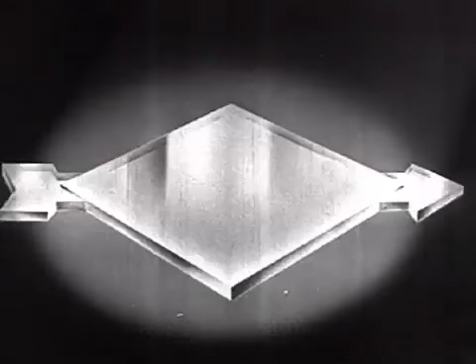The flash of power, the gleam of oil. In the sky, the power of oil conquering the heights. On the sea, the might of petroleum pulsing in great engines of the liners that traverse the deep. On land, oil feeds the fiery furnace or drives the diesel engines along far-flung rails of steel. And on the open road, well, you know what makes your auto run.

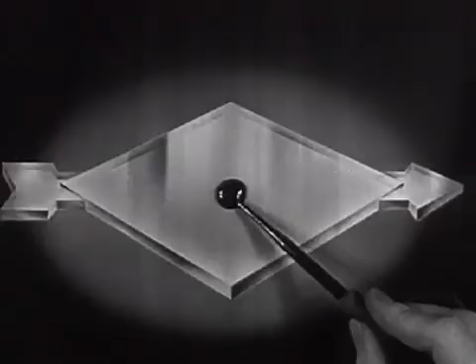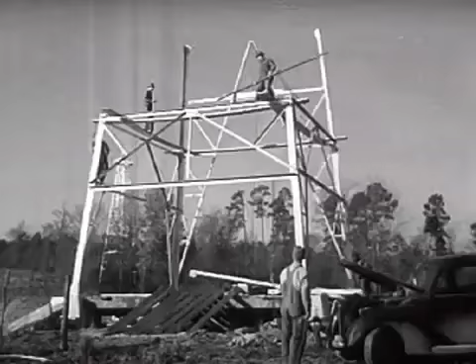For millions of years, this source of power slept peacefully in the dark recesses of the earth until modern magic loosed the liquid energy from its subterranean prison. Great areas became forests of towering derricks. And here's how the petroleum forest grows.

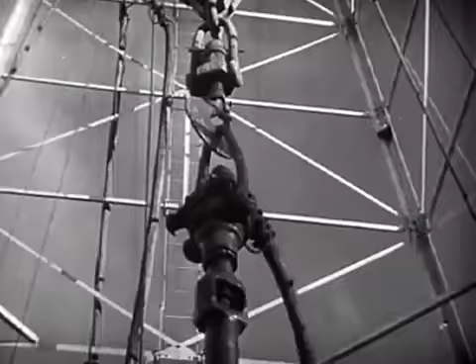A cellar is dug, and a rotary table to turn the drilling stem and the bit is set in place. Round and round the rotary goes, drilling deep down to oil. A steam engine drives the drilling mechanism. They're inserting a length of pipe, lengthening out the stem for deeper drilling. A new joint is waiting.

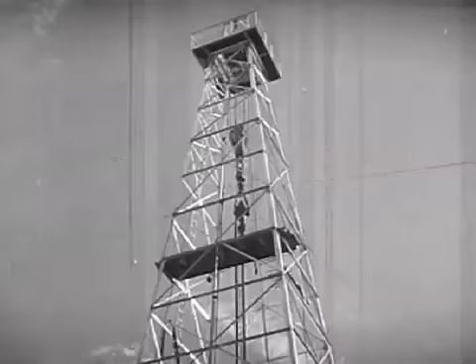Oil field workers are called drillers, roughnecks, roustabouts, rope chokers. The oil field treats our ears to odd and colorful names. Now the drilling stem has been lengthened, then round and round once more.

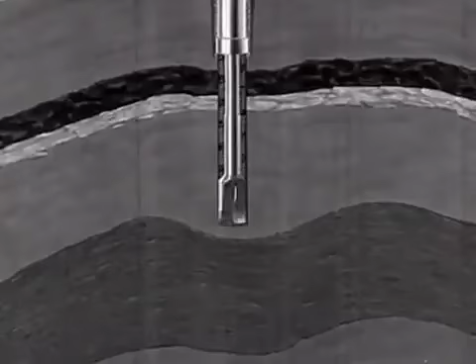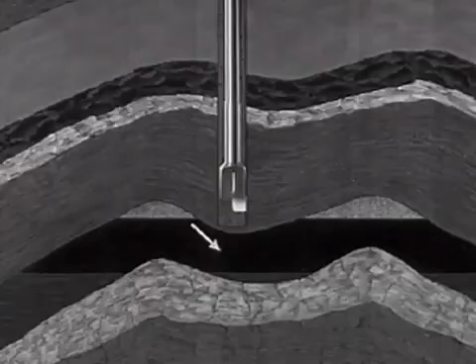Down through layers of sandstone, shale, limestone, down to astonishing depths. This well 5,000 feet. Some 10,000, 2 miles into the earth. And then, after weeks of drilling, fighting against natural obstacles, the drill at last reaches the oil sand, porous rock, which holds the oil much as a sponge holds water.

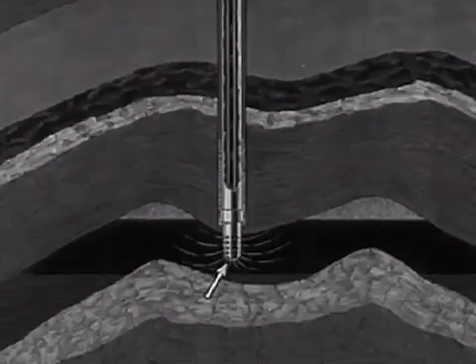Next, the casing is lowered to the bottom of the hole and cemented in position. Then drilled through the oil sand, and a screen is installed at the base of the casing. The screen extends down into the oil sand. The oil flows through the screen, up through the small pipe tubing to the surface.

So they've struck oil, and now the well must be cleaned of the mixture of drill mud and oil. Some wells flow of their own pressure. Others must be pumped, need power.

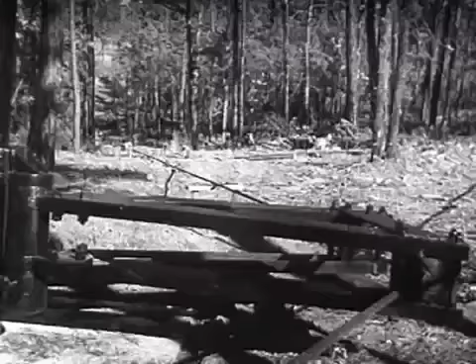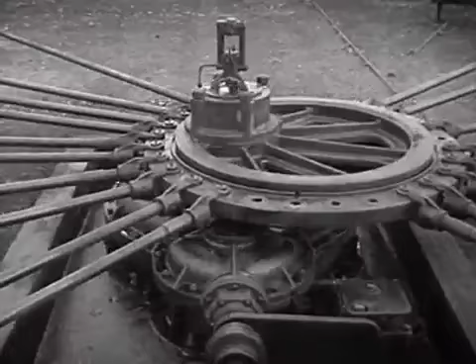The power is transmitted to groups of wells, the ever-swaying rocker arm, the rhythm of pumping, the unceasing heartbeat of the oil fields. A 24-well hookup is the height of oil field power, pumping black magic from 24 drillings in the earth, all at the same time, out of the ground.

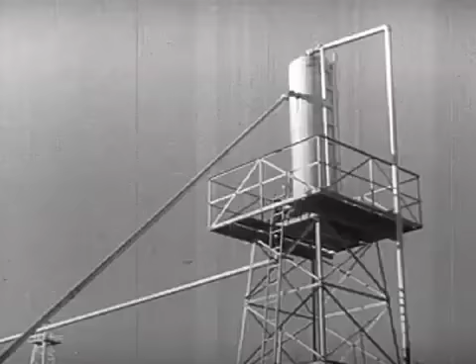The oil is cleaned of natural gas or water, which is combined with it. Next, the petroleum starts on its way through a great network of pipelines. There are powerful pumping stations every 40 or 50 miles to keep it moving along the lines.

The lines of pipe, alive with racing oil, run through forests and over plains to these silver discs. They're storage tanks where the oil rests briefly before it rides the waves in giant tankers. And they're masterpieces of shipbuilding, those tankers of steel. The largest navigate the sea at 15 knots and carry 5.5 million gallons of oil.

The voyage of oil to the refineries. The refinery with its modern structures, technological towers, minarets of science, docks, office buildings, pageant of industry.

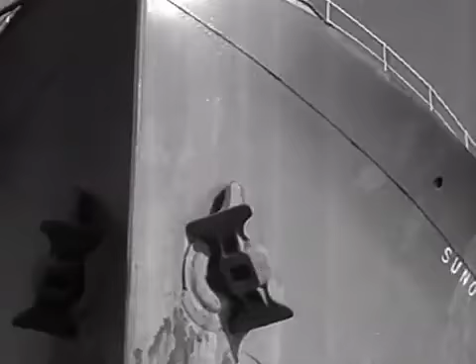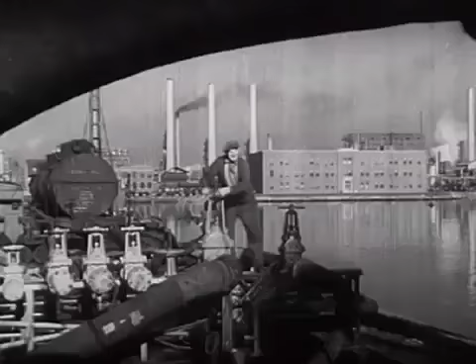Day after day, there is an endless flow of oil as the tankers discharge their liquid cargo. Unloading oil is a vast operation of piping through huge hoses. Discharge pipes on the vessel and receiving lines on the dock are connected, and a cargo of 5 million gallons is discharged in less than 24 hours.

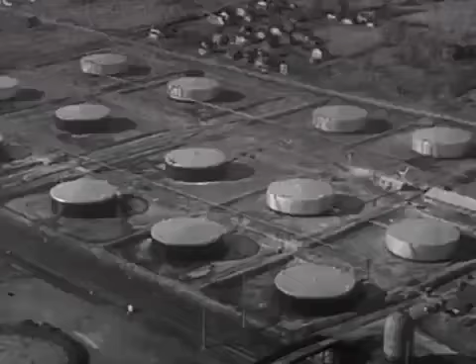No two cargoes of crude oil are alike, so each boatload must be stored in different tanks, and each batch must be processed individually, with laboratory tests to indicate the precise treatment for each.

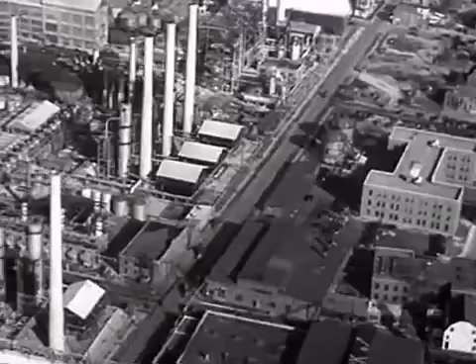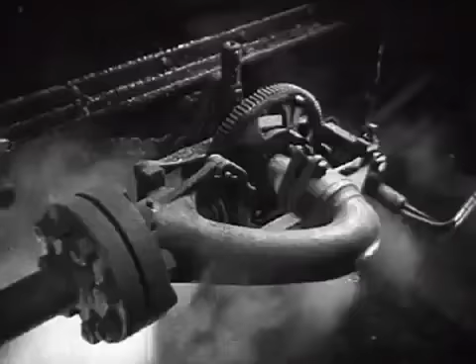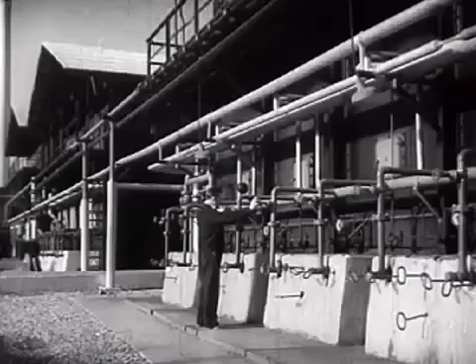That is embodied science. Those masses of strangely wrought steel, forests of stacks, glowering and hissing boilers, leaping and winking fireboxes. Intense heat, the flames roar in the furnace, yet the oil flows so fast the heat does not scorch it. And scientists wrest from the crude petroleum its tremendous power in the form of gasoline and other fuel oils.

And that's done in these towers called fractionating towers. They divide crude oil into the lighter and heavier parts. Those of different boiling points liquefy at different levels in the towers.

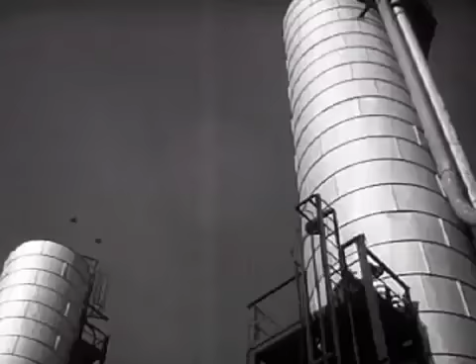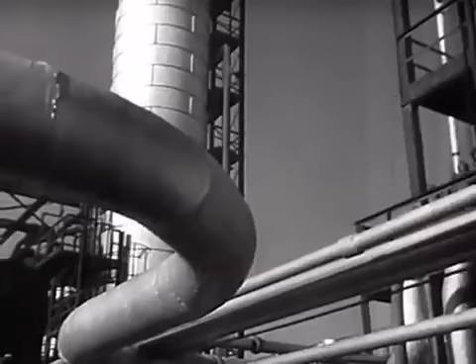Some lighter than gasoline liquefy at the top. Heavier parts liquefy further down. At the bottom are the heavy fuel oils, or the raw materials from which lubricating oils are made.

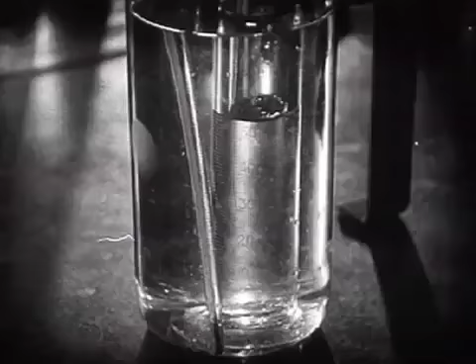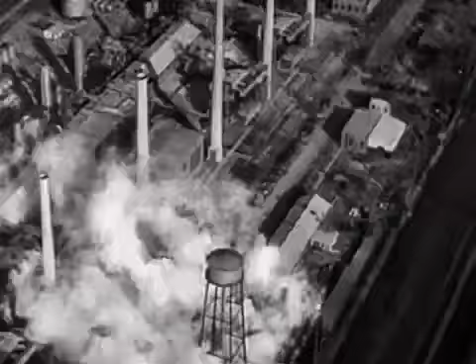When increasing use of motor cars pyramided the demand for gasoline to extraordinary heights, scientists were called upon to devise new methods. How could a greater proportion of gasoline be extracted from the crude oil than that obtained from the fractionating tower alone? To meet this challenge, the scientists turned to products other than gasoline which are drawn from the crude, studied their molecules, and found a way to change them, to turn them into gasoline.

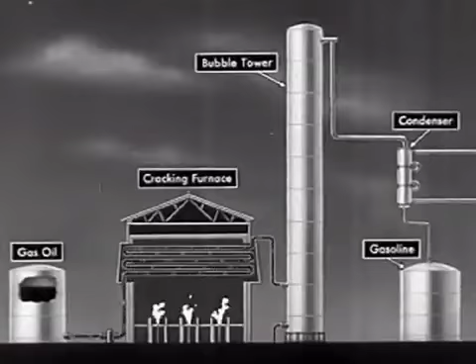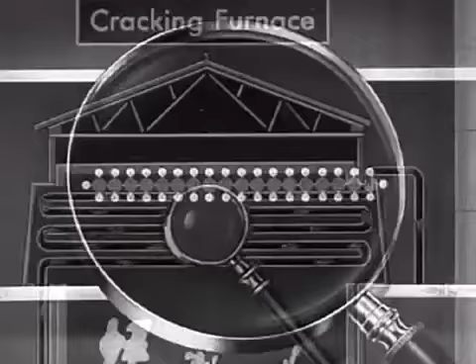The result was cracking. Let's look at a diagram of a cracking plant. Here we see how one part of petroleum that is not gasoline is converted into gasoline. Called gas oil, it is pumped through a pipe into a cracking furnace, heated to over 900 degrees under tremendous pressure. And the individual particles, molecules, are broken into smaller molecules, just as coal is broken under a hammer.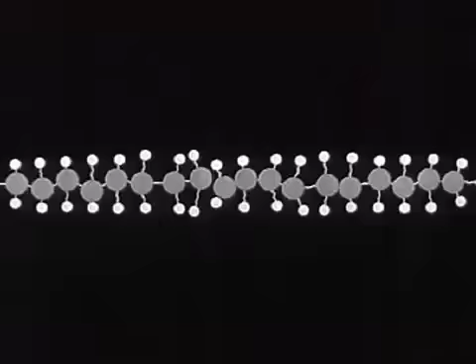If we could see one of those molecules, it would look something like this. The hotter the molecule gets, the faster it wiggles, until finally it wiggles so fast it flies apart. The pieces shoot around at great speeds. They eventually find partners and form new and smaller molecules that look something like this.

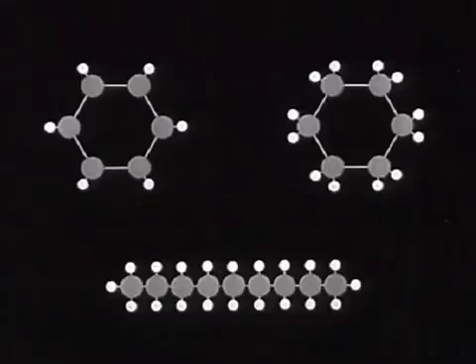These smaller molecules are now no longer gas oil, but are gasoline of high-powered, knockless quality. Some of the gas oil molecules do not fly apart and must be separated from the gasoline. This is done in the bubble tower.

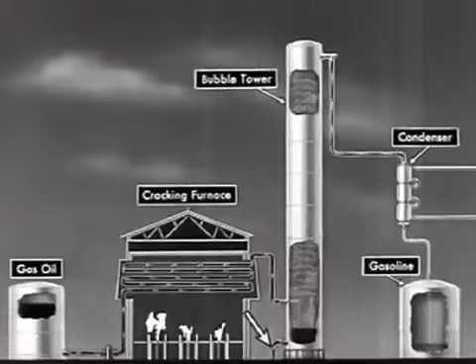Here the big molecules, which are not gasoline, are held back and come out at the bottom as a liquid. The gasoline goes up the tower as a vapor, comes out at the top, and is condensed into liquid gasoline. Gasoline that gives more power to you.

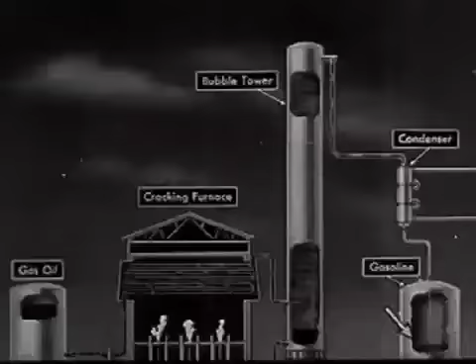Experiment is the key to it all, and this is the experimental laboratory. In the making of powerful motor fuel, the control of temperatures is of extreme importance, and it is measured to an accuracy of 1/100th part of 1 degree.

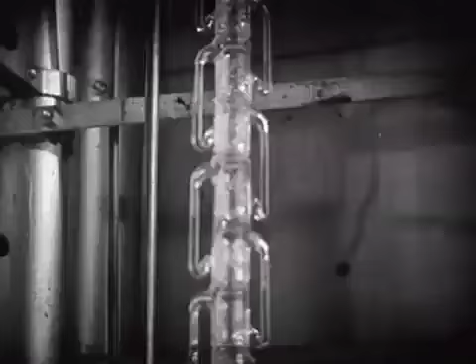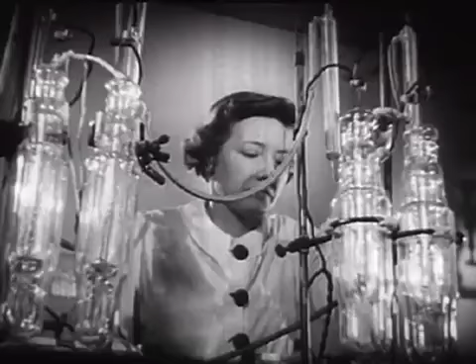Gasoline is broken down into over 200 parts in that elongated tallness of glass, and each individual part is studied. The laboratory with its strange gleaming of new and unpredictable things. Here are created modern miracles with the chemistry of oil.

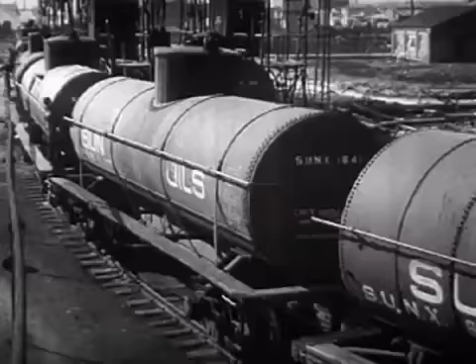Tank farm, to which the motor fuel goes from the refinery and then out to the nation by railroad tank car and by motor barge.

Pipelines run their web-like nets under rivers, over mountains, carrying gasoline that goes into millions of gasoline tanks to generate billions of horsepower for the nation. Oil means horsepower in a horsepower-using world.

Briefly, in 4 words, more power to you.